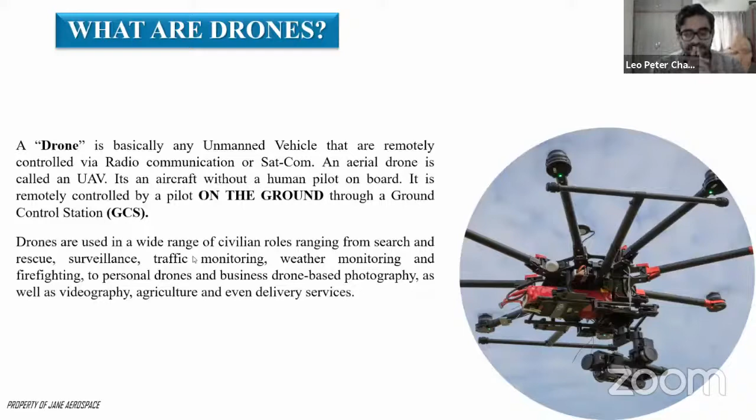So these are the types of drones, broadly classified. There are...

We kindly request the students to stay online. Mr. Leo is having a glitch. I'm back, thank you Praveen. Sorry for that everyone, the line got cut because of the wind and rain. I'm on mobile connection now, so that should be fine.

So these are the types of drones that are there. Fixed wing is the most predominant kind of system that was initially used. It has a longer range, it flies like an airplane. You need a runway to either take off or land, and even if you're hand launching it, you will need a clear path for it to take off.

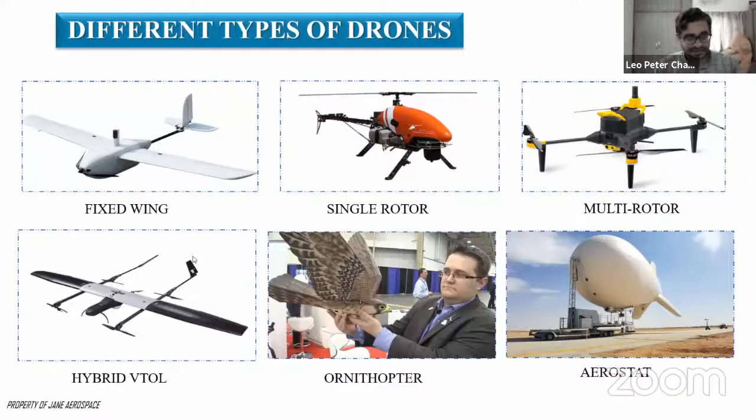So what is urban air mobility? Now, urban mobility started long back. Urban air mobility initially only consisted of helicopters, right? And now that entire concept has been repurposed to take into account autonomous passenger carrying or cargo carrying air vehicles for transportation.

Now, why do we call these taxis or air taxis as drone taxis? It's because nobody is flying them. You sit in it, you punch in the coordinates of where you want to be, and the drone flies there. Even when you want to hire a drone taxi, you just open your phone, put in the details of where you are, and go to the nearest landing pad - that could be any high-rise building with a helipad on it, at present, because that's the most suitable infrastructure available. It will come there, and then you can hop in and reach your destination.

Most of the urban air mobility, or the drone taxis as we call them for ease of use, are all electric powered, so most of the energy is green. They all run on batteries, and these batteries are charged by solar at most places. So they're trying to fully make the entire drone-based or autonomous urban air mobility go green. And these systems will have backups - they will have parachute systems, they will have airbags for cushioning impact in case something goes wrong. But that's a very, very low probability, because whatever clearances normal aircrafts go through, these will also have to go through, and even more, because nobody is actually flying these systems.

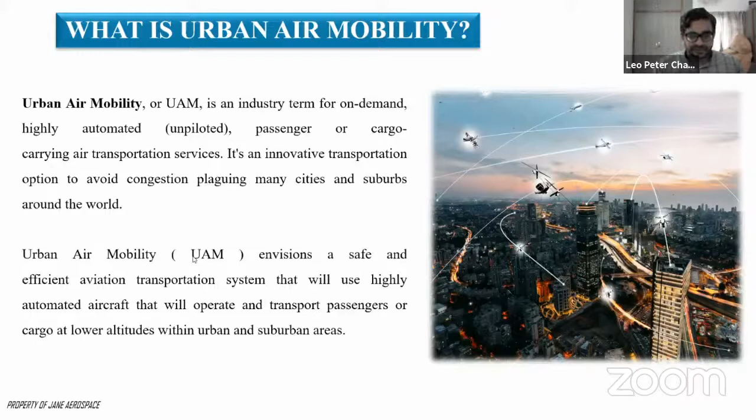So let's look at the market. It's very important to look at any market before we go further, because if we have to step into it, it becomes important for us to understand what's the benefit for us out of stepping into that technology, or how can somebody make a business use case out of it. Because if you don't have a business use case, generally tech doesn't come out, right?

So the market is growing at a compounding annual growth rate of almost 13.5%. This is a very good number. It was 2.6 billion in 2020 - this is the amount of money that's been invested into that market, and operations have already started in China and South Korea. It was to start in Dubai last year, but because of the pandemic, that got pushed, and testing has been going on in the United States. We have major players like Wisk, Lilium, EHang, Volocopter, Airbus, and Boeing being part of this, where they're looking to make this available.

What this is also doing is eating into the chartered flight segment. For instance, some of you may have seen the air taxi in Bangalore, where you had a helicopter ride from the airport to different locations. As a simple example, from Kempegowda International Airport to Electronic City, the cost of a cab is almost the same as going in a helicopter.

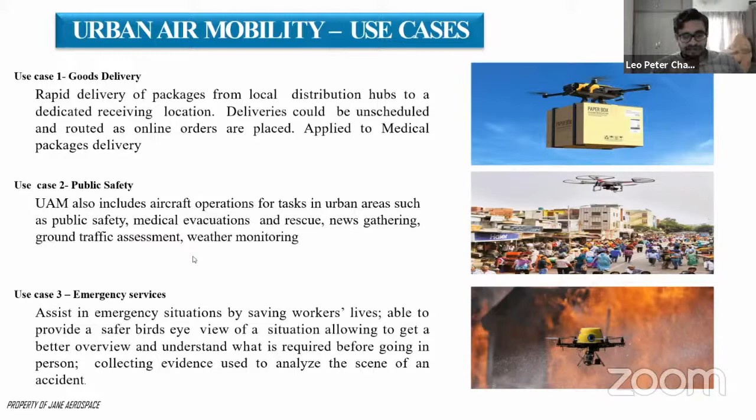Another thing I recently saw is that EHang is using drones coupled with tanks containing fire suppressants that could fly near high-rise buildings. Let's say there's a fire on the 40th or 50th floor — today apartments are being built at that height, so by the time someone went up from ground level to rescue, it would be impossible. If we had a flying fire service, whatever we could call it — I don't have a name for it yet — firefighters could hop on, go to whatever altitude, suppress the fire, and also spot survivors. That's also possible.

What we could also do is connect tier 3 and tier 2 cities. So let's say you have to go to Ballari or some location like that, where there's no airport and the nearest one is 200 kilometers away — you'd land there and then have to take the road. Instead, you land at that airport, take a drone taxi, and reach your destination. 200 kilometers can be covered in a very short time in the air, making it more viable. That's another space where manned and unmanned operations are integrated, and you can use that segment too.

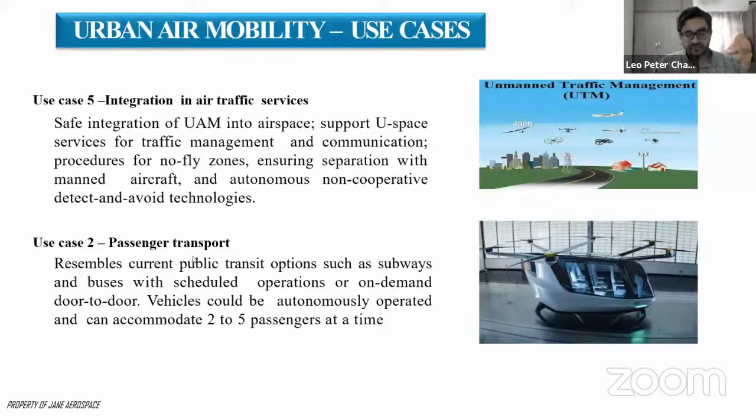Last, of course, all of it put together is passenger transport, where we could have passenger services for 2 to 5 people going forward.

Airbus was working on two concepts, the Vimana and the City Airbus. The Vimana is a single-seater, and the City Airbus should be a four-seater, last time I talked to them. The City Airbus is a bigger concept, and they've been running tests in the US and Europe. It's pretty interesting — they envision something like a small minibus concept that can do hopping between stations.

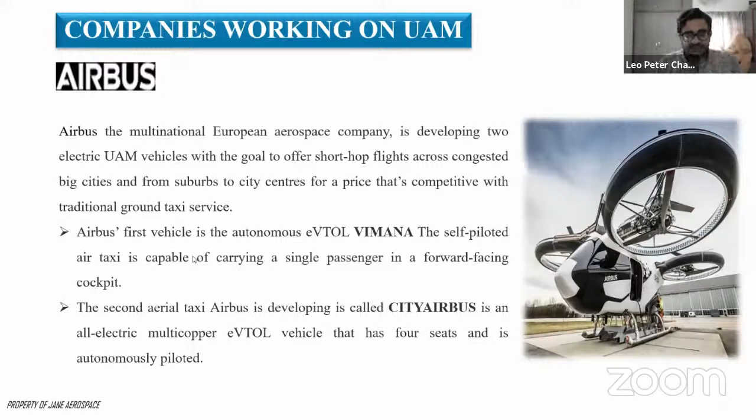Let's take a look at the video.

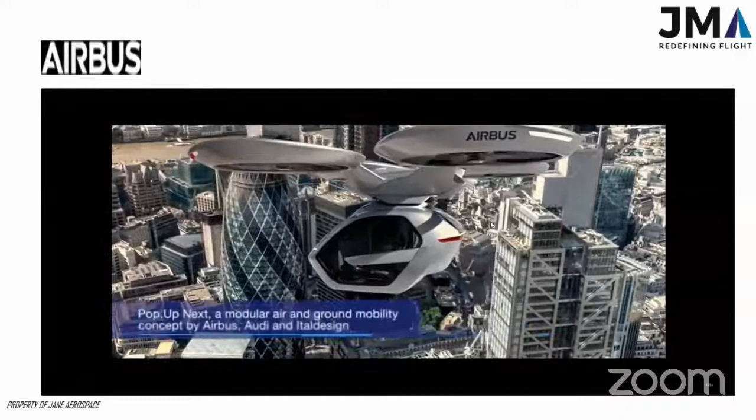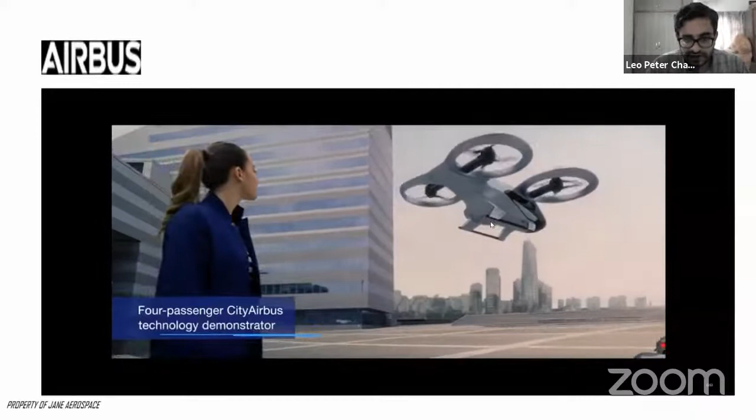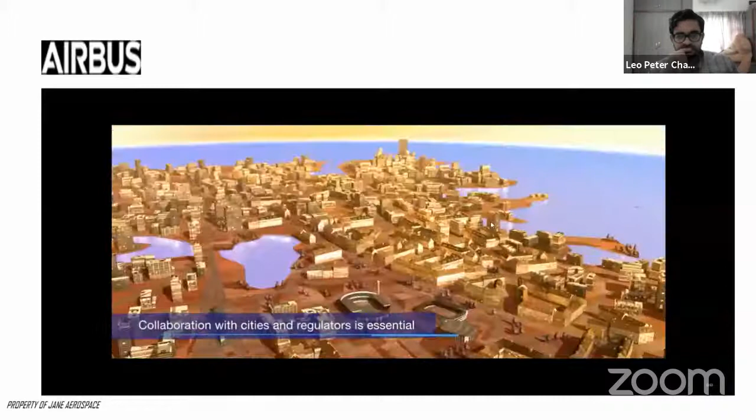This is a rendering, but this is what Airbus envisions will happen in the future. You can see an ambulance, you can see a drone taxi, and then an AI-based UTM for collision avoidance and being able to reach your destination in the fastest way. So this is what Airbus envisions and how they are working toward it.

Uber is also working on the drone taxi concept. They're working with a number of companies to build these drone taxis, which they could use instead of regular cars for their services. They're running tests that will have flying operational in Dallas, Los Angeles, and Melbourne by 2023 — that's what Uber is promising. Let's take a look at that.

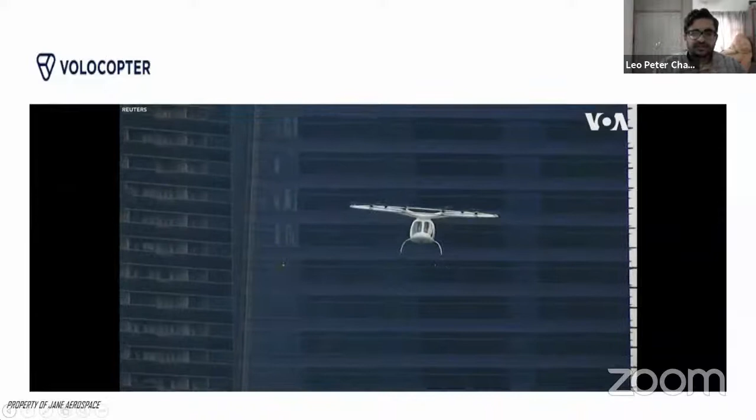This is not rendered. This is the actual test flight that they are doing.

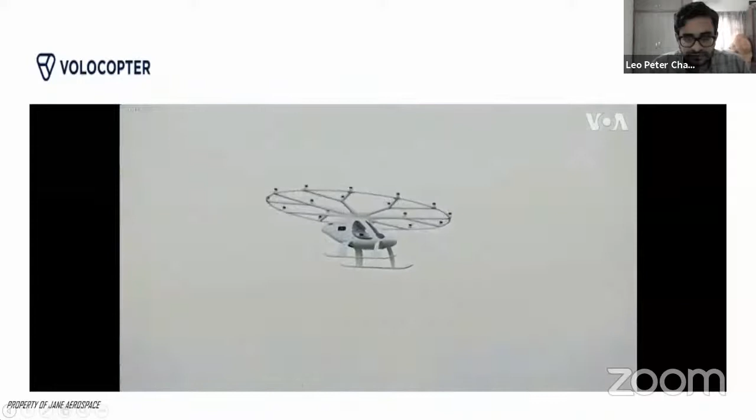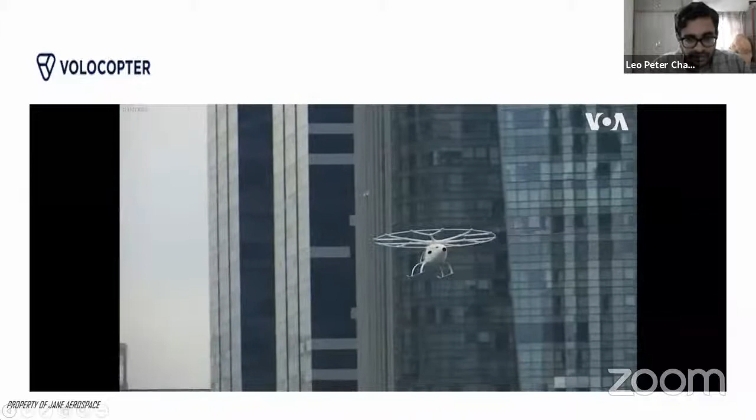And these systems are more suitable to have on top of your houses as well, because it's multi-rotor. It can do VTOL capability, it can do VTOL transition, and the only larger part about it is that entire propulsion ring that it has over the drone.

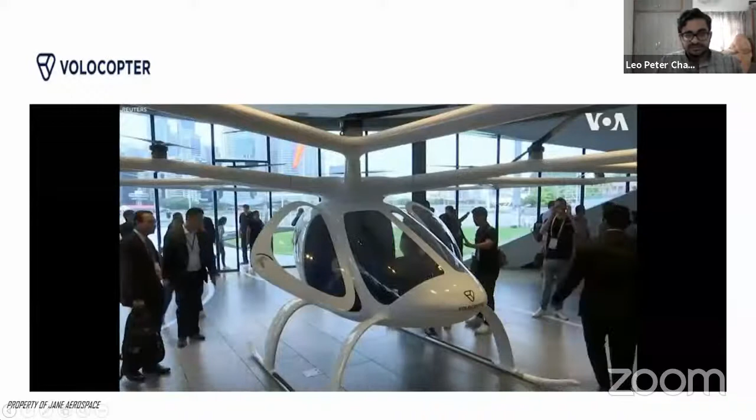So the best part is you don't have to get a pilot's license to fly. You just hop onto it and then it flies, minimizing a lot of human error in the entire process. So that's another advantage. And then when you have to come to land, you don't need a longer runway. You can just transition and land vertically.

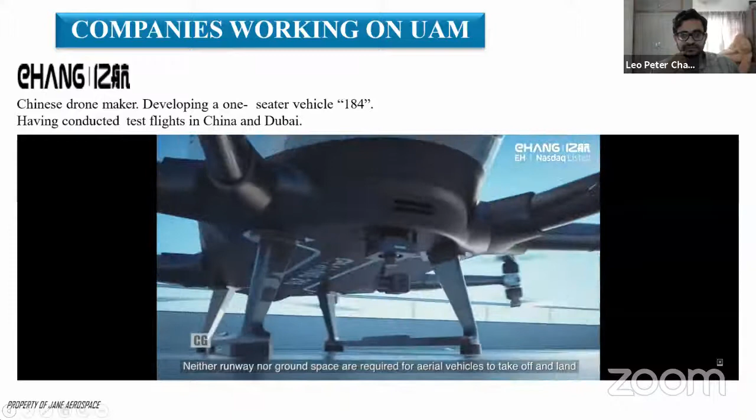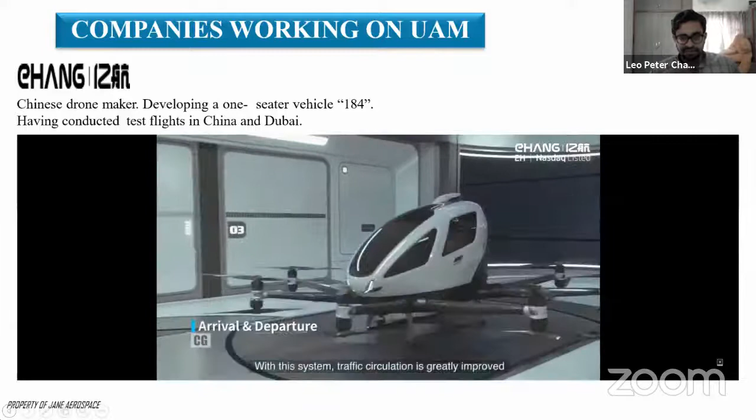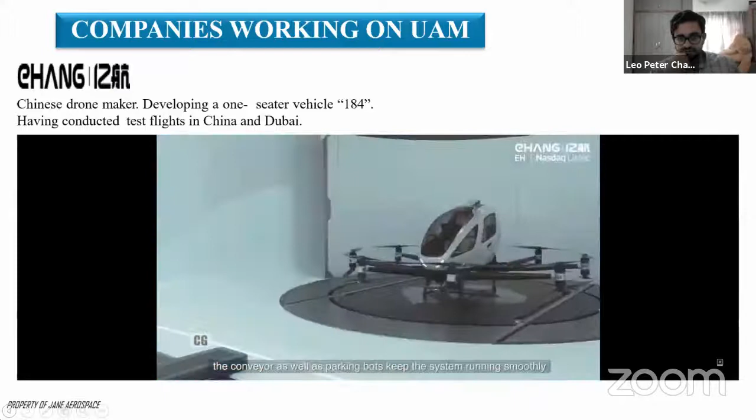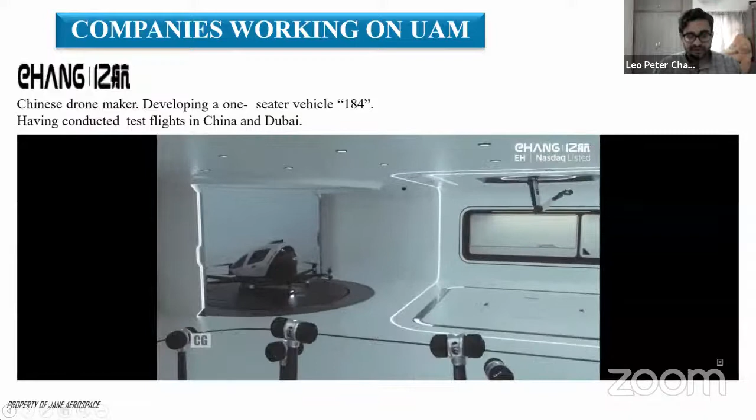Even a concept like a drone taxi station, like how we have the metro, is also very much possible, where you have these drones where you go in and climb onto a drone and go to the next location. Here you can also see another thing, the foldable arm concept, where you could actually park your drone in the parking lot, and the arms can open up once you're going to fly.

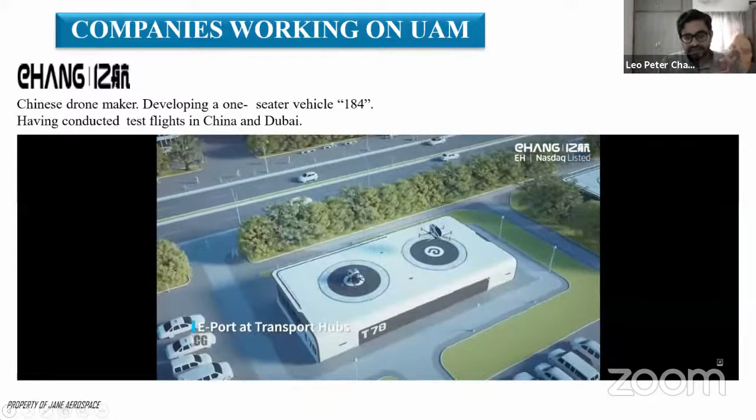And since it uses advanced GPS and all of that, you have better accuracy in where it lands, and the technology is also encrypted, so you don't have to worry about somebody overriding the transmission and then taking control.

They are one of the first successful and commercially viable companies that built this capacity, and they've been demonstrating this technology all over the planet.